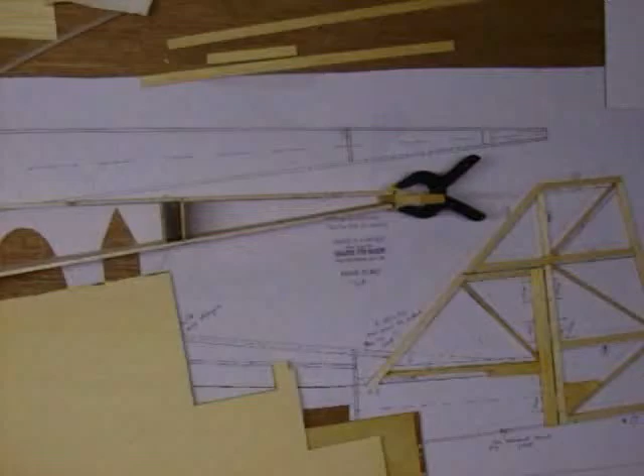Alright, now I'm going to create a piece to put in the middle here. As you notice, my F7 is here. This is just a piece I glued in the wrong place, so you can see everybody makes mistakes, but no big deal. As I put the stabilizer on,

to know where that was going to be. And then I put the fin and rudder in and put it right where it's going to go. And then I took a pen and marked where the trailing edge, the leading edge of this fin was going to end up. So you can see it ends up right where that mark is.

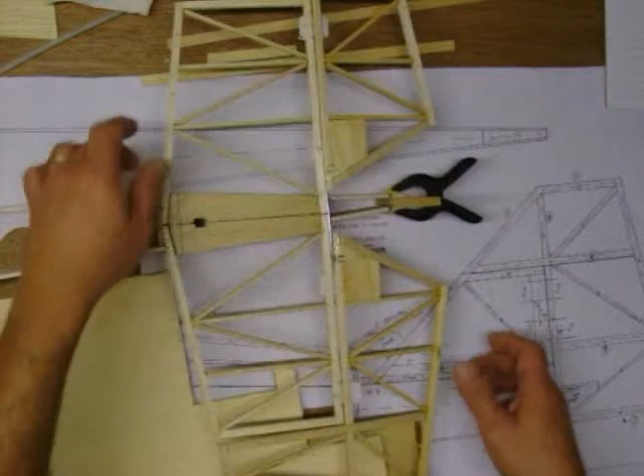And then I put a substitute piece in because I need to work in there, so I can't have this in my way. But I just made 2 marks there and there where it's going to end, and I put this block in there. And I'll remove this. So the first thing I want to do is get my distance.

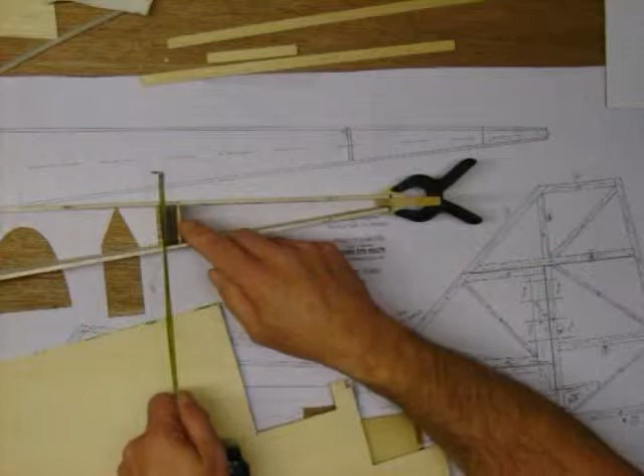So I measure in between the edge, right up against the stabilizer front end here, or F7 I'm talking about. So I'm going to take that, that's 1.25 inches for me. Then I'm going to take that 1.25 inches, and hopefully you can see. I'm going to take the 1.25 inches and mark it right off here first.

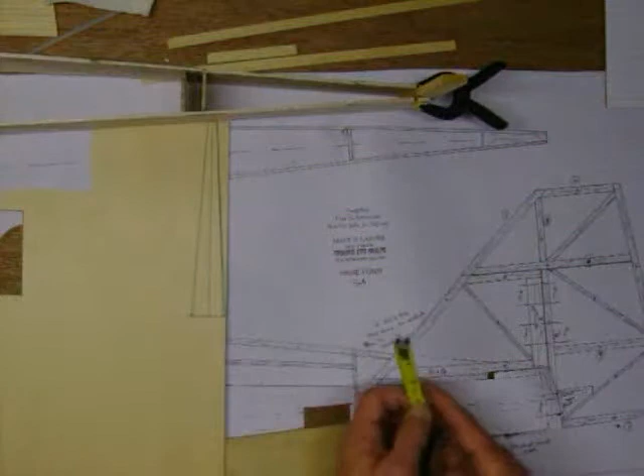So that's what I did. I marked my end of my first 1.25 inches. Then I took a straight edge, or my 90 degree. I put my 90 degree on there and drew the line straight across. That's how I came up with this line. So I had 1.25 inches from the edge to the edge here, using the very end.

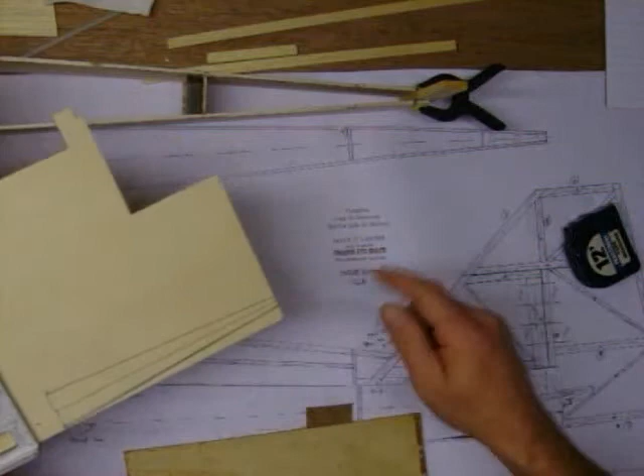And then I just went 1.25 inches, as you can see my other mark is right there from this end to end. And then mark the center line from here to here. Now from that center line is where I can get my other marks.

So now, because I had 5/16 here, and that was 5/32, I just put the tape measure straight on the center and measure over 5/32. And that's where I got the bottom from, and 5/32 that way. That's where I got the bottom from.

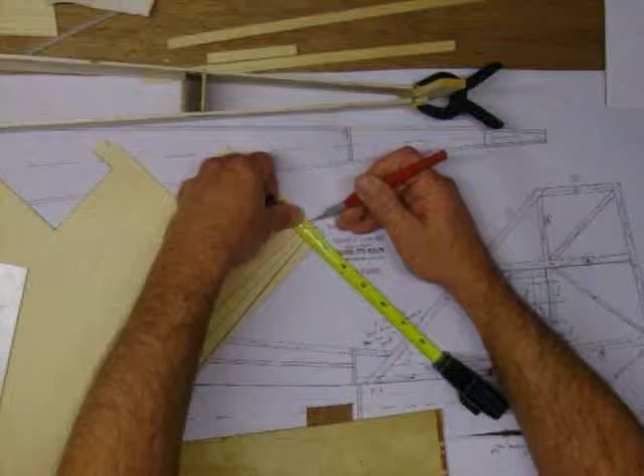Mark that, and then the 1.25 inches, which was this measurement up here. On the inside of the fuselage is 1.25 inches. So from the center line, I just took half of 1.25 inches. And then marked that off here, which was the very edge of the piece of wood actually.

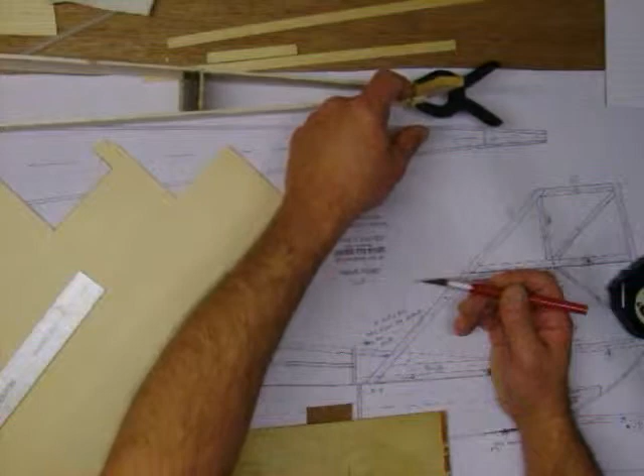And then took that same half, and I went up to here, and marked off the half point from there. And I just took my straight edge, and I'll cut this out. I'll cut this angle out, and then that piece is going to fit from your F7 straight back to where your rudder is going to be, and we're going to glue it just below the notch here.

So you want it level and flat. You have to be careful with this piece that we're putting in because you don't want to offset anything. You don't want to make the stabilizer crooked. So when you put this piece in, you're going to just take something flat and just push down the flat edges of it while the glue is drying.

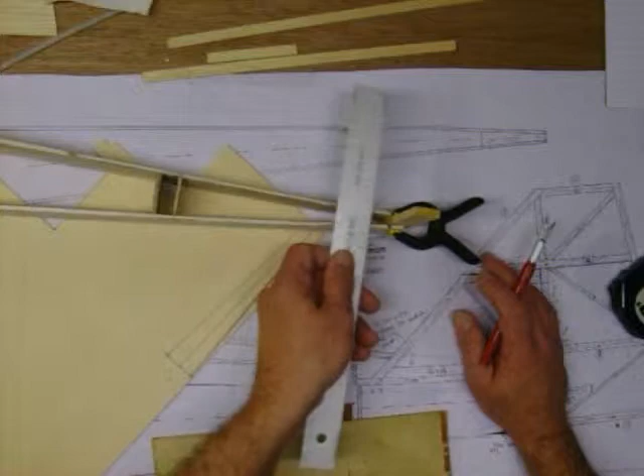I'll probably epoxy it. But just by going from here to here, you should be able to get the whole thing as level as you want it in there, and it'll be right where it needs to be back in the notch area. And that's as easy as it is to come up with the inside piece.

Alright, now as you can see, the piece fits right in here. Basically, I just took something flat, laid it across the top, and pushed it up from the bottom, and it fits in nice. And we'll glue it from the bottom before we continue on to closing off where we

can't get inside there. Or you can just take Zap and run it right over the top and just make sure you wipe it down dry. So that's probably what I'm going to do. I'm just going to use some Zap. It just goes right from the back of where your fin comes into the rudder, so you can see the fin goes to here. There's where you make your mark. And then just follow that right on up to F7.